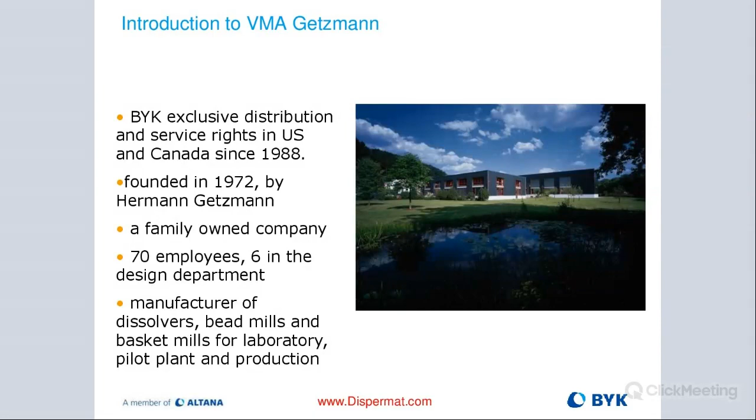The company is all over the world pretty much, present in 65 countries at the moment, every continent pretty much, very innovative, very flexible to customer requirements. And the philosophy is really to cover not only the lab space but all the way up to pilot and then production. And we offer trials on a custom basis up in Wallingford or in Germany at the VMA headquarters.

When we use, for example, a Cowles blade or a disperser, and we put in some shear force, we're actually breaking up these binding forces. So these agglomerates are turned into aggregates. These are the smaller clusters. If we want to go down to the primary particle size, a shear or Cowles blade is no longer sufficient. We really need to do some fine grinding or media milling. That would allow us then to turn these aggregates into the primary particles.

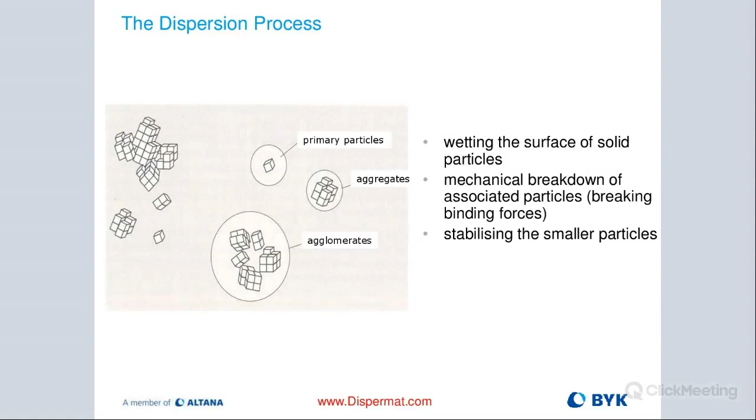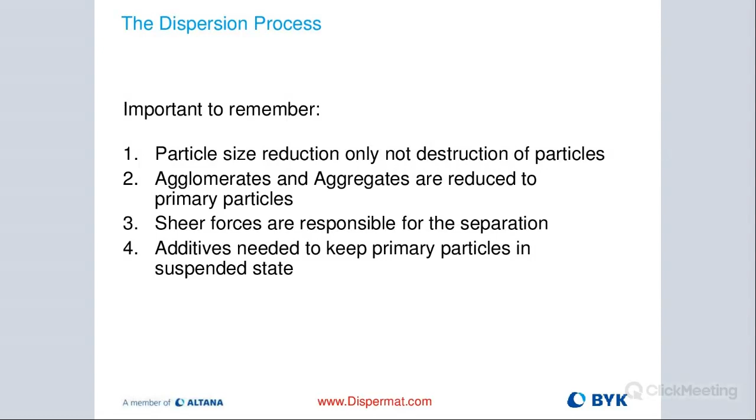So it's really critical to remember that we are not talking about destroying any particles. It's really just about particle size reduction. Agglomerates and aggregates are reduced to primary particles, and really the shear forces are responsible for that separation, nothing else. And then at the end, we want to use the right additives to keep these particles in a suspended state.

So in the dispersion process, we have two distinct processes. The first initial part is called the pre-dispersion, where we use the mixer or the dissolver with the Cowles blade. And what is important to remember, we always look at tip speed. We have a lot of customers that ask us about RPMs. While RPMs are important, it's not the only value that we need to look at. It's only part of it. The most important value is actually the tip speed or the peripheral speed.

And we're looking to be anywhere between 18 to 25 meters per second of tip speed to optimize our pre-dispersion process. Anything less will just lead us to more time that is needed to break up these particles. Or if we put in too much shear, then we may not be able to also disperse. It's kind of like a diminishing return. So really the sweet spot is 18 to 25 meters per second.

When we accomplish that, we're looking at around 10 to 20 microns of particle size; that's how small you can go in the pre-dispersion process. Really not much smaller. Obviously, that also depends on the type of product that you're running. Not all the pigment classes or materials on the market are the same. But usually 10 to 20 microns. That's where we need to stop when we reach that point, and that's when we move over to the fine dispersion milling or grinding process.

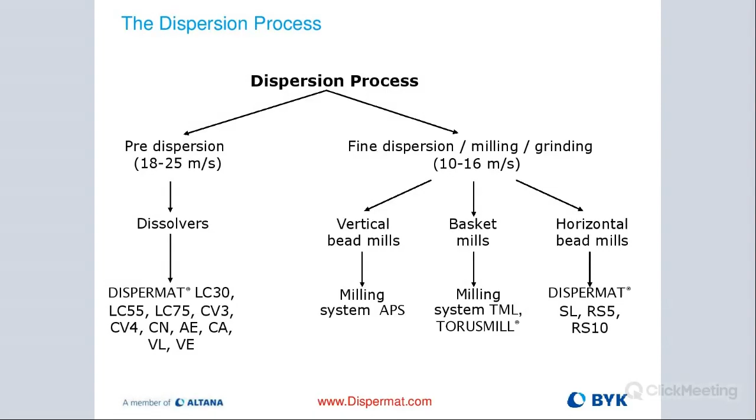We're going to talk about that in a second here, which is actually the visual cue, what we are looking for when we actually look inside of the container during the dispersion process, telling us whether we're doing a good job or not. And also important to remember is you don't want to be too low in the container. You always want to have about half an inch to an inch, depending on the container size, obviously, distance from the bottom up to the dissolver blade.

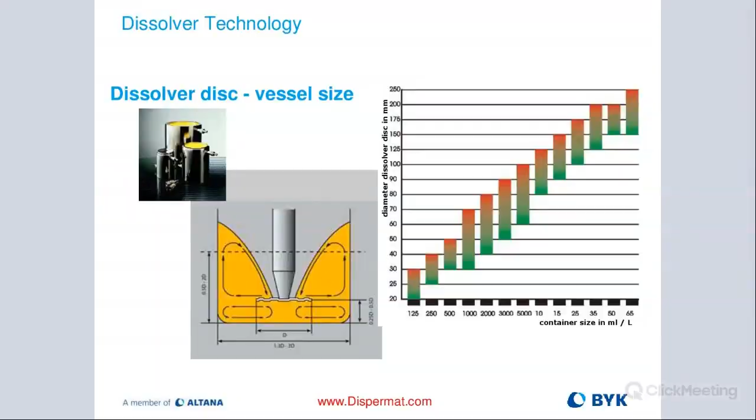The next slide here is really important. It's how you calculate the tip speed. Again, RPMs, different models have different RPM ranges. The larger the unit, usually the lower the RPMs. And the reason for that is that the diameter of our blade is larger for larger units. Therefore, we don't have to use such high RPMs to get to that optimum tip speed of 18 to 25 meters per second. So the tip speed is actually calculated pi times the diameter of my dispersing blade.

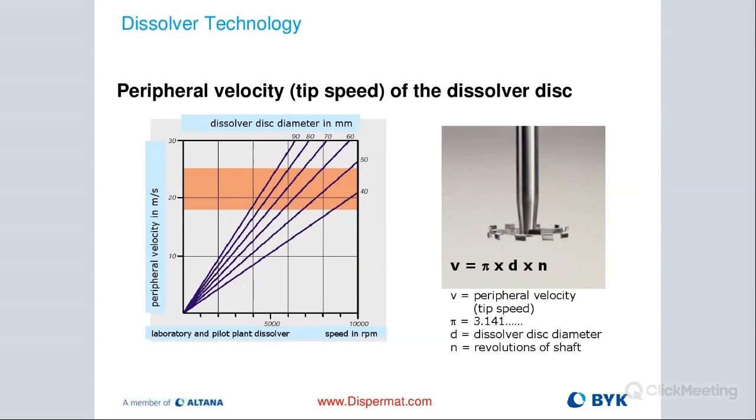So if we want to calculate meters per second, we would do that metric. So with my 50 millimeter blade, we would use 0.05 and then multiply that by the RPM and then divide everything by 60. That would give us meters per second, and that would then allow us to precisely calculate it. On the higher end machines, on the AE model with the C technology, we actually display the tip speed on the graphical interface. But that's a good formula to know, and you may want to write that down.

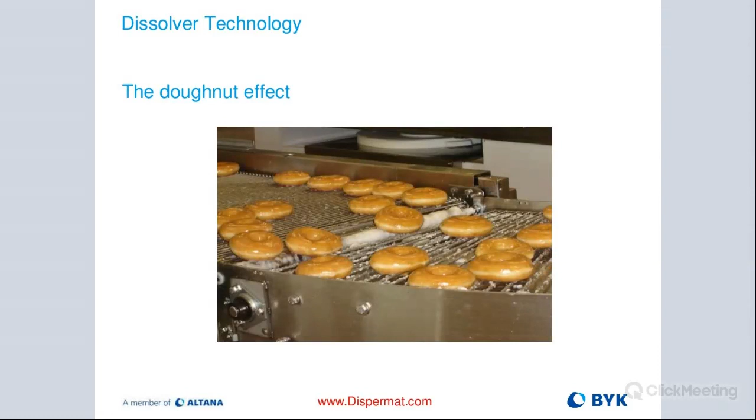So the donut effect, it's really called that because when you're optimizing the pre-dispersion process and you're actually looking inside of the container, you should see kind of a donut being formed. And that's what you really want to see. So the actual breakup of the particles happens on the edges of a dispersing blade. And I would actually have added on this slide some more particles on the bottom because you're shearing there as well. So it's not only on top. So the shearing action also happens on top and on the bottom of our dispersing blade.

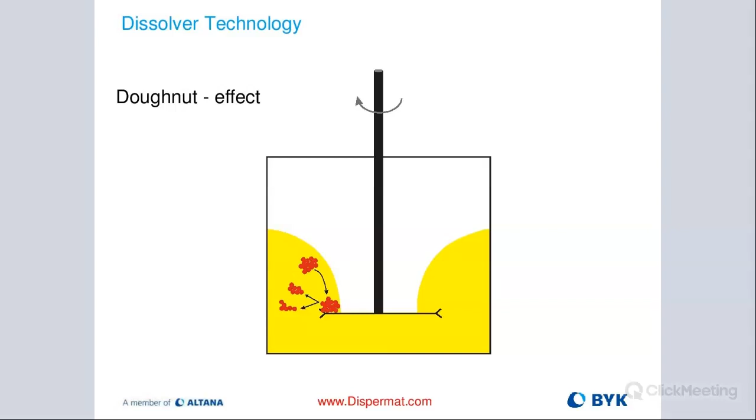So I didn't personally design this graph, but you can imagine there should be more particles there, and obviously on both sides. So that's what happens when we're actually pre-dispersing and we're introducing the shear forces, how our particles or larger clusters respond to the shear force.

So here is a good example of a donut. That's what we see when we have an optimal dissolver prep. In this case, we have 21 meters per second of tip speed, and we're putting in about 850 watts of energy. We have really good viscosity. Everything is optimized. That looks great. You can expect to have really good particle size reduction. Usually, depending on the product, anywhere between 10 to 25, 30 minutes is usually how long it takes to deagglomerate these particles with the Cowles blade. And then the next step obviously would then be to do milling.

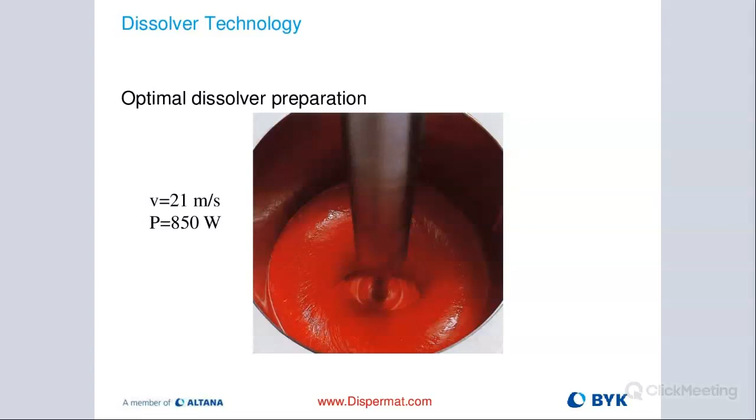In this case, the viscosity is not really high. We don't have a donut, and we're only putting in 320 watts of energy with the same tip speed. So it's not ideal. So in this case, you should really look at the formulation and maybe increase the viscosity somewhat, but you're going to disperse a lot longer because you're not having the energy input that is really desired to really break up these binding forces.

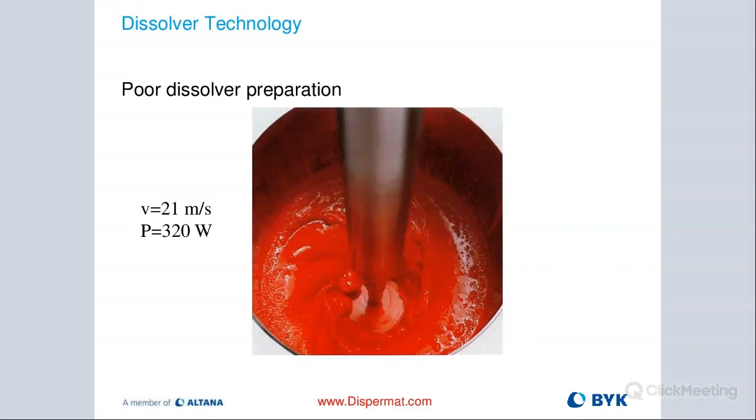So when something is really low in the viscosity range, it's sometimes more difficult to get a donut. If it were, for example, like water, you would never see a donut. The donut would immediately collapse and it would be very difficult to put in any type of energy. Also, if you have some material that is extremely viscous, sometimes you're also not seeing a proper donut at all. So that's also possible.

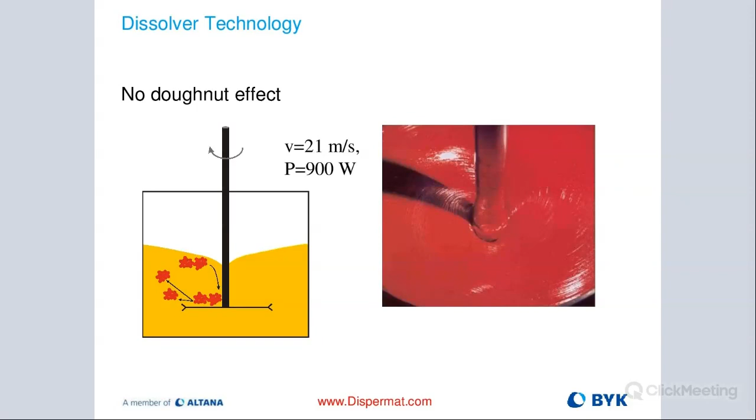Okay, so important to remember is in order to optimize our results, the dispersion time, 15 to 30 minutes. Some cases it can be even faster, 10 minutes I've seen. The donut effect, as long as the viscosity is properly dialed in, usually around 2,000 to 10,000 centipoise, you should see a really beautiful looking donut. Anything less or more, it may be more difficult to get that. Tip speed, again, 18 to 25 meters per second.

Geometric consideration, what we talked about, the blade diameter to the vessel, right choice of impeller disc. So there's a number of ones on the market depending on the product that you're running. So you have some choices there. Use the one that works best for your process. The amount of mill base, usually the rule of thumb is about 50% fill rate in your container.

You can go up to 70%, but not more. Otherwise, you're going to spill the material, and it's not desired to have product running over the container edge. From a formulation point of view, pigment and filler concentration, very important that you optimize that. Keep the temperature usually as low as possible for most products. In some cases, we have customers for certain applications that actually have to heat it.

But when we are dispersing and we're dialing in the parameters and we get to our tip speed at 18 to 25 meters per second, you can see usually that we are introducing a lot of energy, and that will automatically bring up the temperature. So you would want to have a double-walled vessel and possibly some cooling capabilities like a chiller. Some people use tap water that they hook up to really maintain a certain temperature that is good for your product.

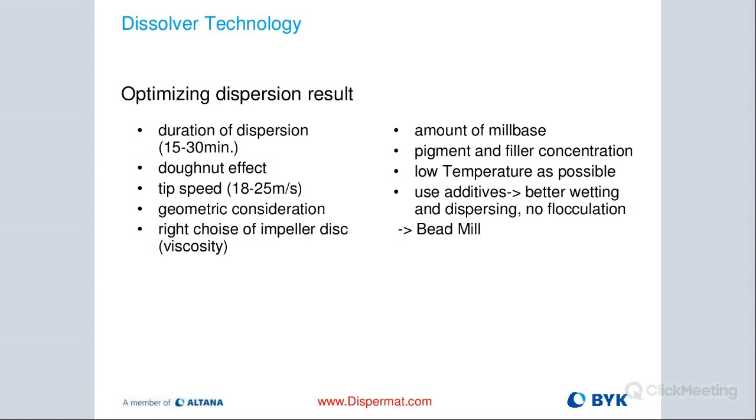And then again, use the type of additives that work for your formula, like to improve the wetting, dispersing effect. And then we don't want to have any flocculation once we complete the process, so that these particles actually stay in a suspended state. So that's also very important. And once we achieve all that, then you can move over to the bead milling process, which is then where we go down to the primary particle size.

So because it's a short presentation today, we're not going to go into the milling part so much. This is more of an overview of the pre-dispersion process and the actual different types of equipment. So here you see the entry-level model. That is actually a CV3 right there. That's perfect for a small lab, benchtop unit. You can go up to 20,000 RPMs with the blades that you can pick. Very easily will you be able to get to that 18 to 25 meters per second.

It's fully modular, allowing you to put on different attachments on the same unit. So you can turn this small disperser into a media mill or a vacuum system or even a rotor stator. There's a wall scraper system that you can purchase for really viscous materials. So it's very versatile. That is kind of the trademark of the VMA Getzmann Dispermat brand, that they have all these modular capabilities. We also offer explosion-proof units, and then the premium models have the software capability, our C technology, that allows you then to store data in a database or on a disk or anywhere where you want to send the data.

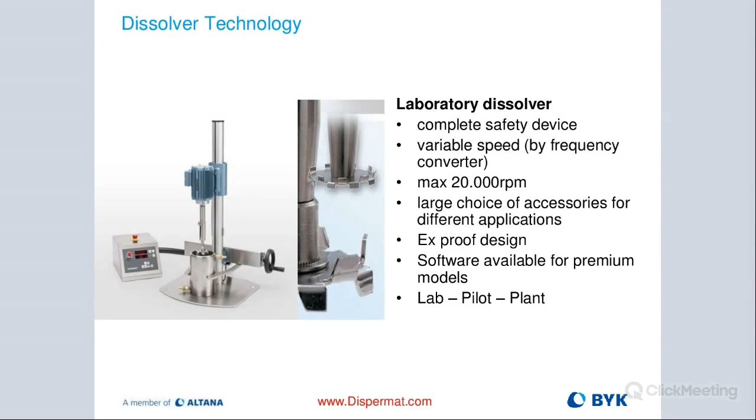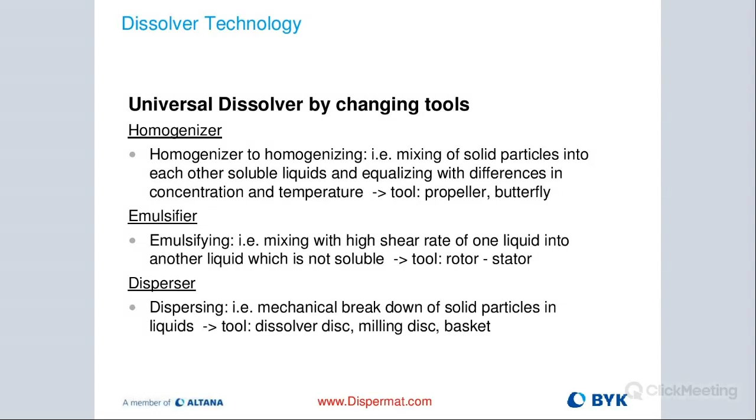So we have the capability of making these changes, so we can turn the disperser with the Cowles blade on the fly. I can turn this obviously into a homogenizer, so I can use a propeller tool or butterfly tool that I can put on there. I can use it with the rotor stator attachment to do emulsification of different materials. Some people also use that for some sort of milling. For certain applications, works well. And then obviously it comes with the dissolver discs to do the dispersing or mixing. And then you also have the capability of adding different milling tools, either for the APS, we add a milling disc, or you can add a basket mill onto the same unit. So very versatile pieces of equipment.

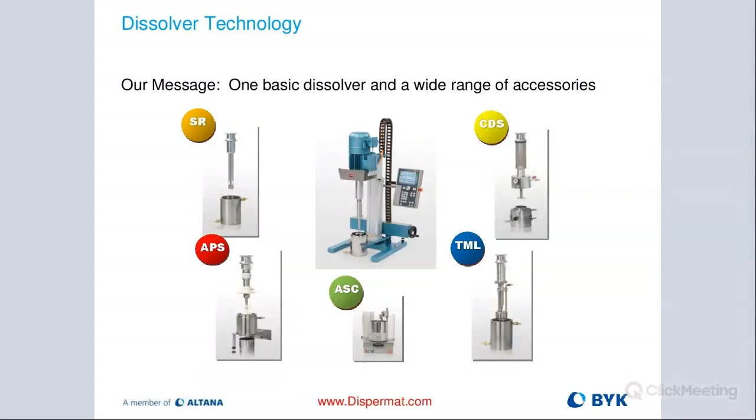That's a great slide showing you one standard disperser. So this is the flagship model, the AE, with the new control panel, the C technology, and then on the pictures around it, you see these different attachments. So we got the rotor stator on the top left. Bottom left is that APS vertical bead mill system. On the bottom in the middle is our ASC wall scraping unit. Then we have the TML, which is our basket mill, and on top right, we have our vacuum system called the CDS. So they can all be purchased either at the time when you buy the Dispermat or at a later time. They are always available, and that gives you full flexibility to run them for different products.

So this is the LC, very inexpensive, pretty standard. I'm not a big fan of it personally because you have to manually lift the motor up and down with that. You see that lever right there. You turn that to open it, and then it allows you to move the motor up and down the shaft manually. So if you want to oscillate, or you frequently have to move the blade height to a different location, I don't recommend it because you do that manually. It's a pain in the butt.

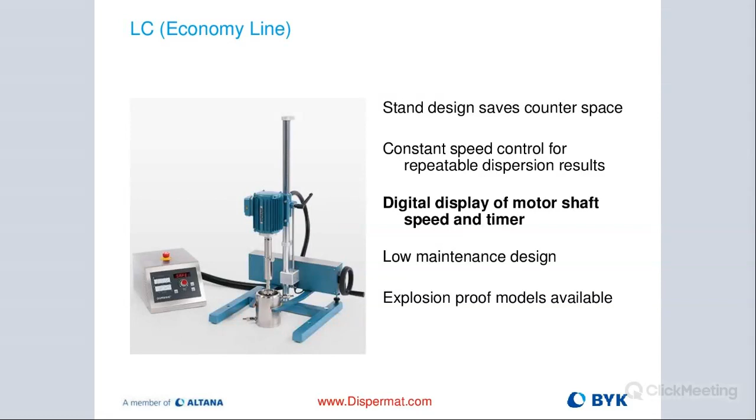So the next model we talked about earlier is the CV3 that has that electric capability. This one is relatively inexpensive. We also have the ability to display the speed and also a timing function on the display.

But it does have the modularity. So that's the CV, that's the next one up. Still an entry model.

Electric lift motor, which is nice, comes with different safety features. One is called the working area safety feature, which allows you to set an upper and lower threshold with that slider on the side. It uses an Allen key to loosen, and you can slide it up and down to set the upper height limit, and on the back there's another one for the bottom. That allows you to safely operate the disperser when it's running inside the container. If somebody were to lift it up while it's running, it would stop or automatically shut off, depending on the model. So you would not have a spinning blade outside the container, product flying around the lab, and nobody gets injured by a spinning disc at 20,000 RPM.

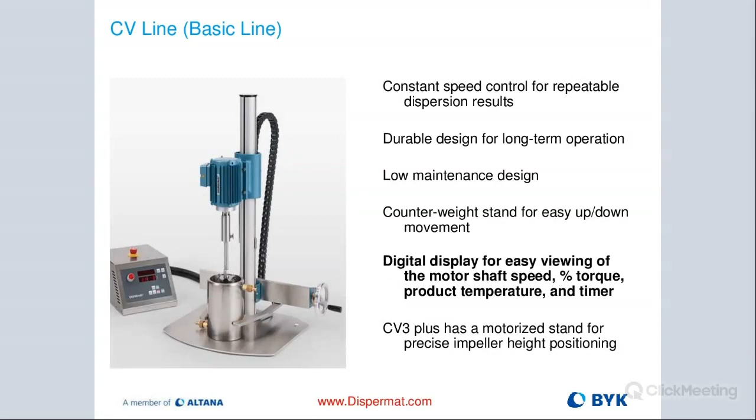This model will also give you the ability to measure temperature, which is great especially if you want to use it for milling. It also gives you a torque reading, which is a percentage of the motor power being used. Also, timer function and RPM are displayed right here on the control board. Very low maintenance, great machine.

If you've never worked with the Dispermat, one thing that really stands out is the noise level. They're extremely quiet. We have a lot of customers, especially at the show, come to us and say, can you turn it on? We turn them on, they run at 10,000, 15,000 RPM, and they say, I don't even know it's running. That's how quiet they are. No comparison to a lot of these other mixers on the market. They're really, really quiet - it's the brushless step motor technology we use, and they are high-end motors.

They also have extremely low vibration values, so you could actually put a coin on top of the motor and it won't even bounce off. They're that smooth and quiet.

This model here is the CN. It's similar to the CV, except this one will also give you more volume capability, same safety features.

It also has, like the CV3 which I didn't mention, a container clamping system - that wheel on the side, you use it to loosen and tighten the container. If the container is not fully tightened, the machine will not power on. It will show you on the display that it's not safe to operate, so you have to tighten that. There's a sensor back here to ensure not only that the container is perfectly centered, but that it doesn't wiggle around, because you don't want the container or the blade touching the container wall at high speeds, especially if you're running solvents. That's not a good idea. But great machine, kind of a middle of the range model.

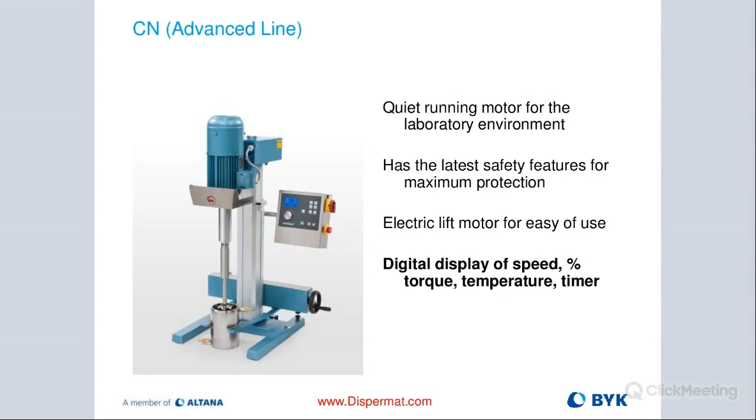So that's the C3 control panel on that CN model - you can see it right here. That's the latest one, introduced a year ago. And here, for that working area I mentioned earlier, you no longer have that slider on the side of the column - here you have it electrically, or electronically, where you can select it with the H1 and H2 buttons. You just press those buttons and it locks in the working area thresholds for you.

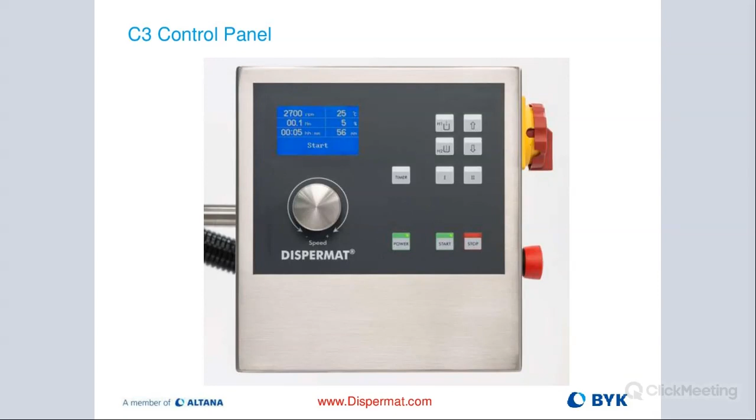It'll give you the ability to change other things, like programming a recipe. So if you want to run one product all the time, or you have a number of different products, you basically set cutoff values, like a certain temperature threshold or a maximum energy input or speed input. That can all be set up and tied to a specific product name or number, then recalled later to automatically replicate the process.

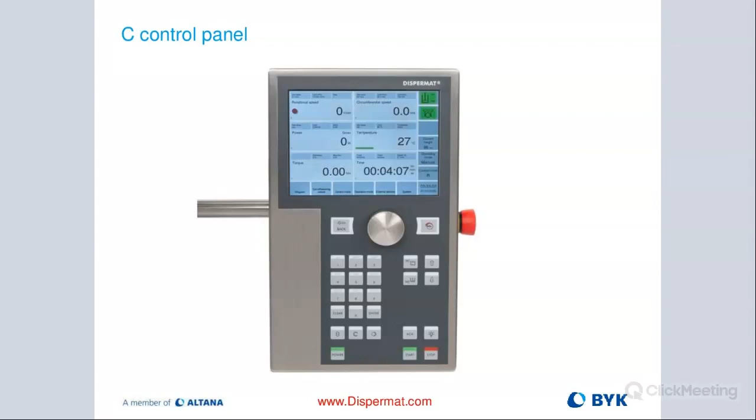What's great about this is it's really designed for R&D, but also with upscale capabilities in mind. So if you have a project you want to take from lab all the way to manufacturing, this particular model is excellent because it gives you the most flexibility for upscaling from lab to production.

And that is the AE, our flagship model. It gives you all the same capabilities I mentioned. From the C technology point of view, it has all the safety features and is also fully modular, allowing you to add on all these different attachments like the other units. On the largest AE, we can go up to about 31 gallons of mill base, perfect for scale up.

It also allows you to do what's called a net power calibration, which lets you run the machine without product before starting with material. Since it uses energy to operate itself, it factors that out, so all the values you see, like the amount of energy you're putting in or the torque value, would only relate to your product and not to the machine input.

These cutoff values can be programmed. Not only can you run with a certain amount of speed, but you can also run the machine with a certain amount of energy. So instead of running it at 5,000 RPMs, I can say I want to run this particular batch with, let's say, 1,000 watts of energy.

The machine will automatically adjust the speed depending on the state of my viscosity. If my viscosity is increasing and my material gets thicker, while I maintain the 1,000 watts of energy, my speed will automatically decrease. If the viscosity goes down during dispersion while I maintain energy, my speed will increase. This is really good because it allows, in an R&D application, precise calculation of the cost to upscale and manufacture a product, since you know exactly how much energy you'd use to make a certain amount of product in a certain amount of time. That's possible with the C technology on the AE model.

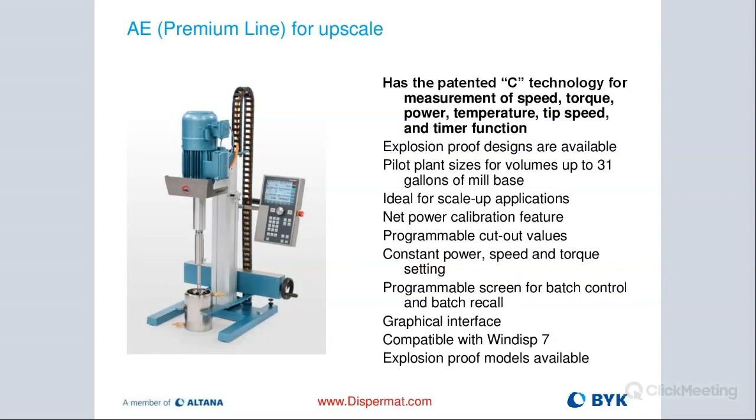And that's it, we're 30 minutes in. If you have any questions, please let us know. There are other presentations we have on YouTube and online, and we'll have other office hours set up for either milling or manufacturing-grade equipment. So if you're interested, let us know.